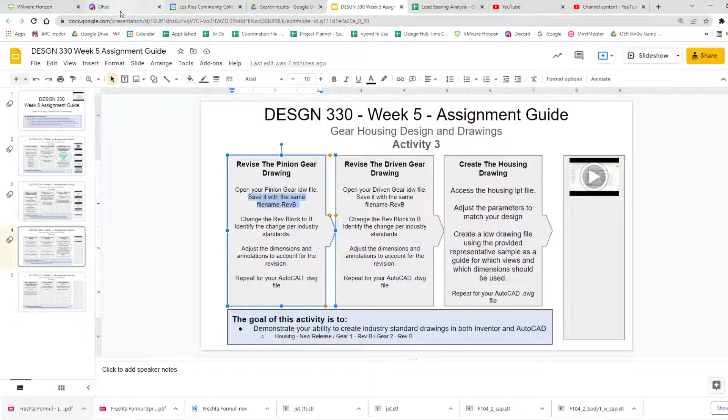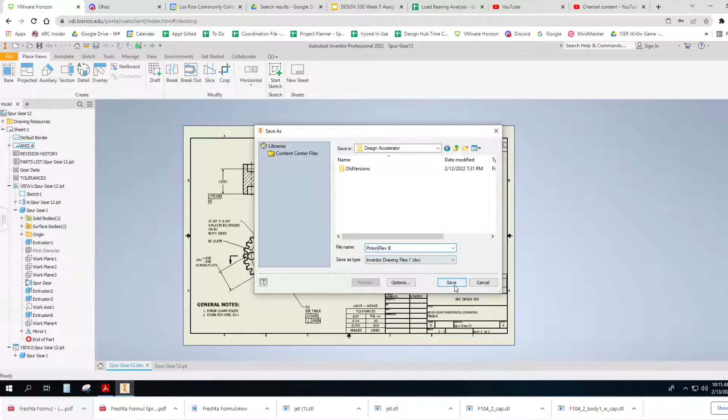Now, because I want you to keep a version of your old one, we're going to resave this. Normally you would not save this as a new file, but we're going to. So let's see what it says to do: open up your pinion gear and save it with the file name revb. So let me go ahead and do that. File, save as, and I'm going to put it in here. revb.

And that way I just know that I'm working on a new one and I don't have to worry about file management control. Now the next thing is we have to change our revision to B, and the description is new OD tolerance. And of course we've got a date, I'll put today's date down, 2/14/22. And on zone, that is for these things right here.

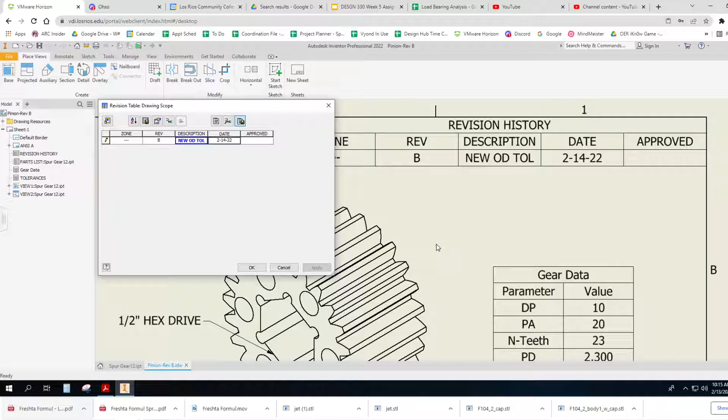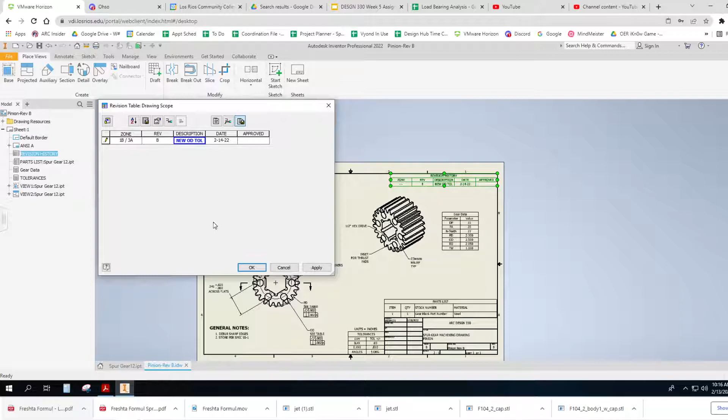Where is that data gonna be found? In this case, I'm going to have to change it here, and I'm going to have to change the tolerance here. So I'm going to find it in 1B and 3A. That lets somebody know where to look. I'm going to say 1B/3A, they're going to look in that part of the drawing. Now, in this case, it's not all that hard to figure out, but it's good to see.

So we've taken care of our revision block. Now let's come down here, and I know that my outside diameter changed to 1.300. Whoops, gotta get that changed. 1.3.

And none of these are right, I just put stuff down. So I need to go figure out what those are. I'm pretty sure this is a 24 tooth gear, but what is my pitch diameter? I have to go back to my spur gear.

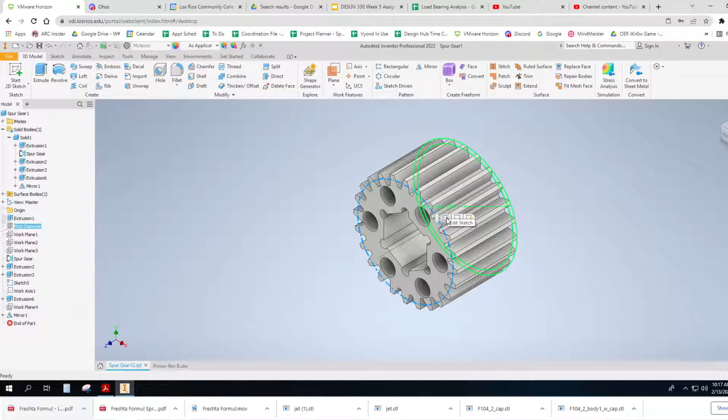So I've opened up my spur gear drawing, and I look through here to see if there's my pitch diameter. Let me see what that is. I'm going to click on it and look at the sketch. 1.2, it's hard to see on my video, but I click on it, it's 1.2. Pitch diameter, 1.200. And that means my root diameter is probably different too.

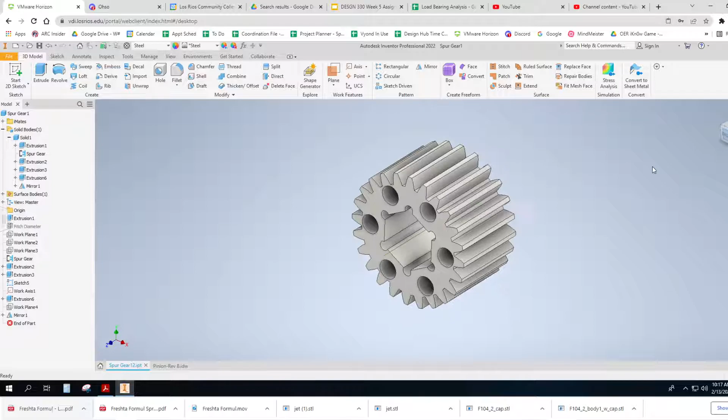How would I find my root diameter? Well, I would use that measure tool again, or I could look it up in here to see if I could find it. But in this case, the measure tool is pretty easy to get. Center of that one, center of that one. 1.075.

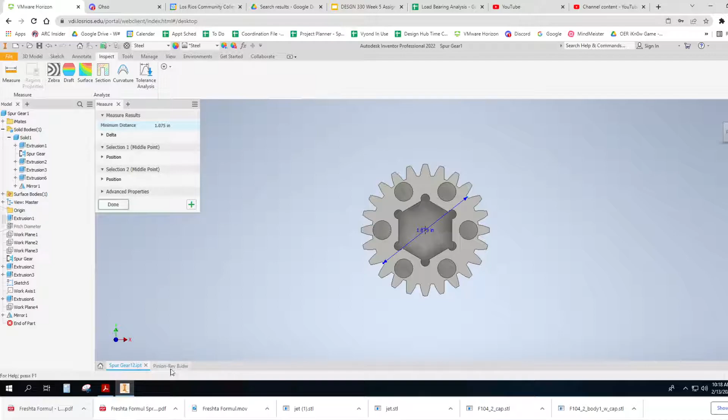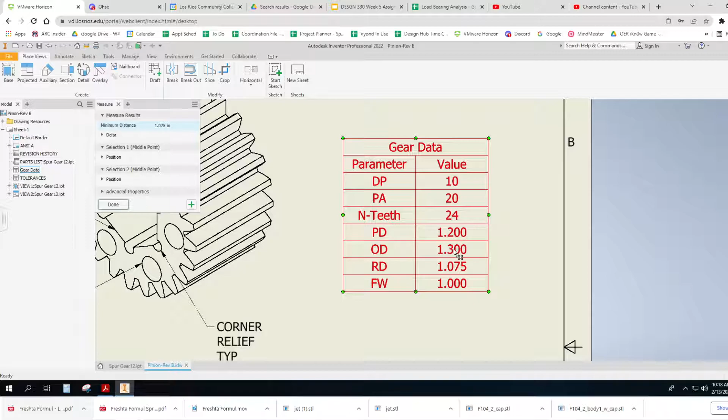So now I've got that. And those, of course, are just gear data, and they're standardized, but now I know that I have a special tolerance on my 1.3 OD. Okay, let me come back to here. I've got a special tolerance on that. Okay, so I've taken care of my data in 1B. Now my OD has to

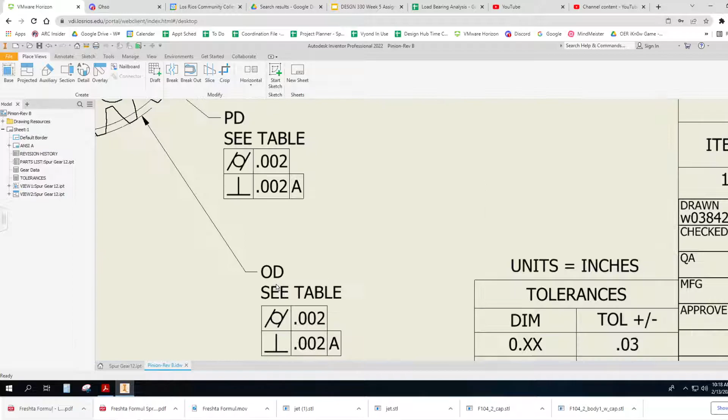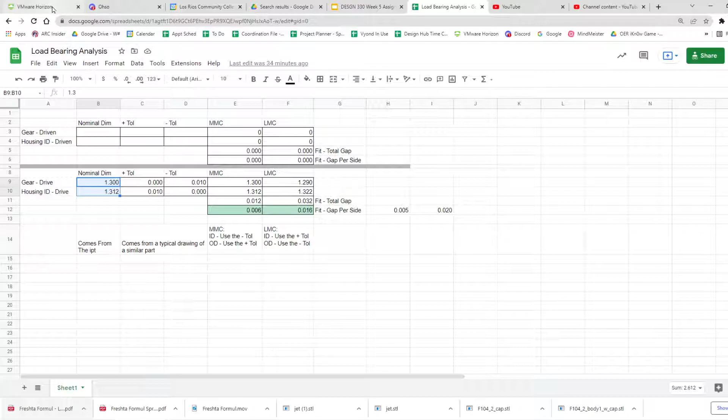change. If I double click that, I need to put a precision and tolerance on here. And that's going to have to be done as text because remember, I've hidden my dimension value. So I'm going to say that there's a special tolerance of plus 0.010, minus, plus 0, minus 0.010. And that's what I got from here, right? Plus 0 minus 010. So I'm going back and forth a lot.

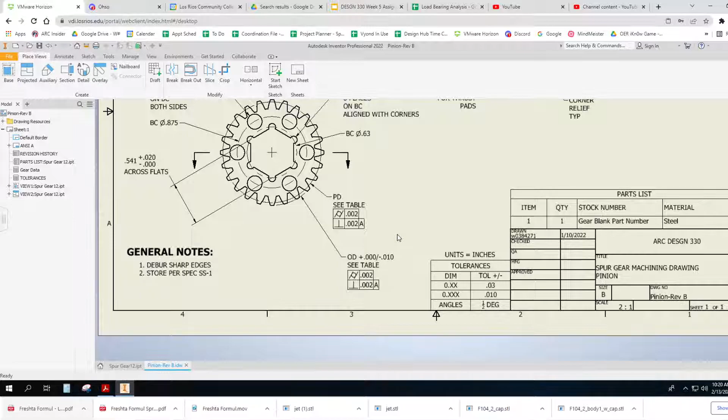I get it, that's part of the job of a designer. Okay, so the OD now has a special tolerance on it. It's noted right down here. You have to tie everything together. Now I'm not changing my standard tolerances because everywhere else I want those to apply. So it's just right here that I want them to apply. So that's how you do changes. Here, here, here.

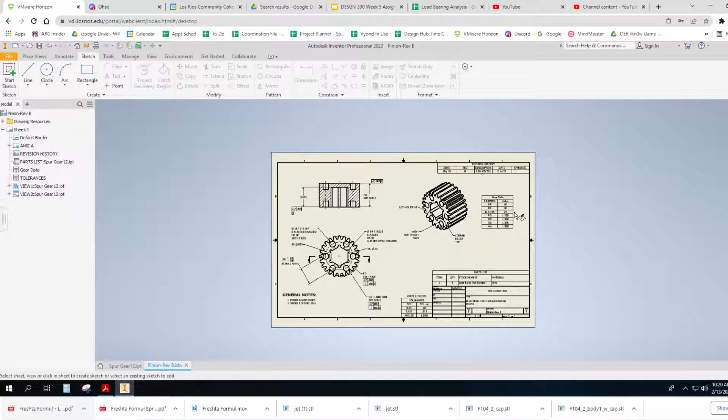And so the other thing that you can do is you can put in a special symbol here. I'll show you that in another view. If you don't remember how to put in a little triangular thing, the easiest way to do it actually is to just make a sketch of it. So I'm going to start a sketch right there, and I'll put a polygon with 3 sides.

Whoop, I got to actually do that. And that lets somebody know that there's going to be one right there. And then inside of it, I can put some text. So you can make symbols for it and all that kind of stuff, but I find that this is

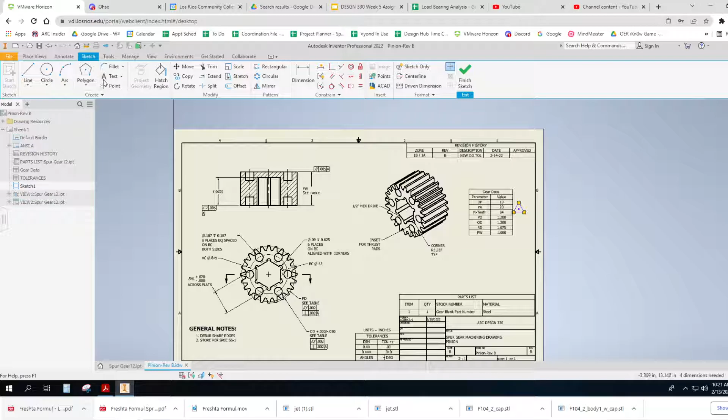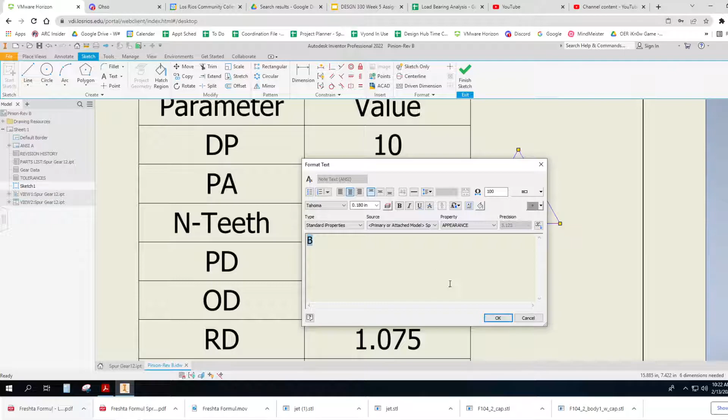fairly straightforward. So here I am in the sketch. I'll put a little piece of text in here. And I'll type B in it. And I might have to move it. And I can even make it a little bit bigger, so I can highlight it and make it maybe 0.18 tall, just so that it's really obvious. And do all sorts of good stuff.

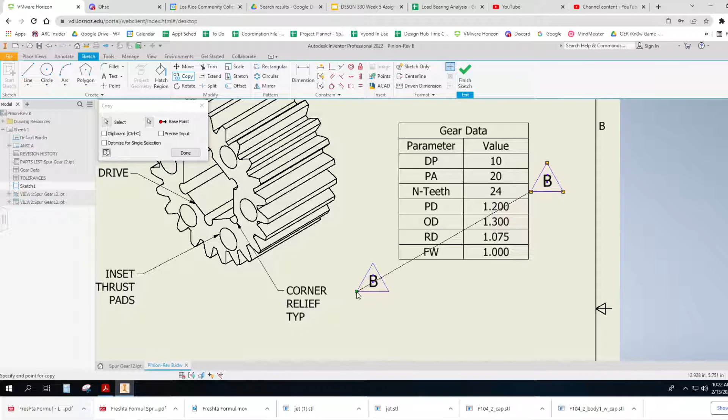You know, I can center it up and things like that and then move it into place. So there, that tells me that revision B happened right there. And then I can copy those, right? And I can put another B down here where I made a change. And I can finish my sketch.

And now somebody looking at this goes, oh, I wonder where that is. Let me look in zone 1B. There's zone 1B, and there is my thing that says, oh, that's what got changed. And then down here in 3A, it got changed. There is more to doing good revision control. There's usually something called a change control number or something like that, and that's a whole nother class, right.

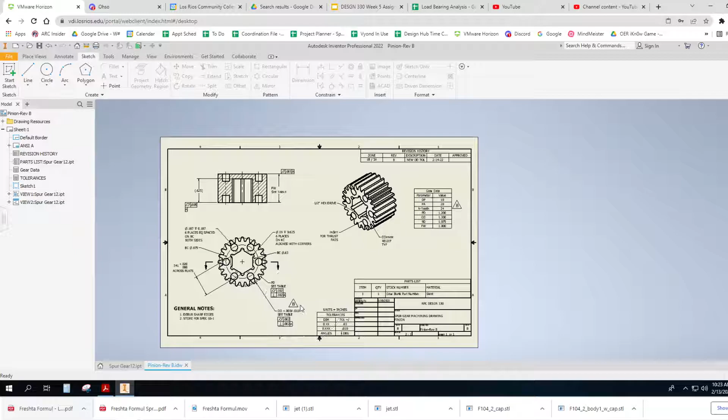But for now, you've got how to make the change so that somebody knows to look for the most current one. And look, this is now Rev B. Cool, there we go. You want to make sure that that's all tied together.